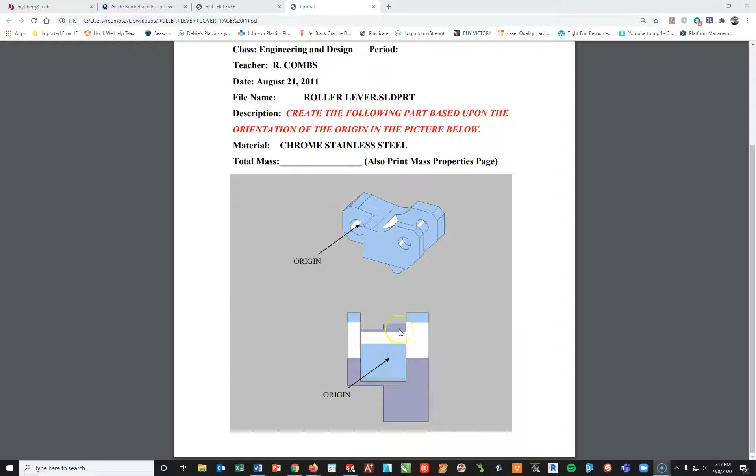We're basing it upon the origin pictured below. I know this is not easy to see, but basically the origin is centered in that hole, and it's centered in the part. So we will be doing a mid-plane extrusion in order to keep this centered up.

Looking at the drawing, I think the best approach on this one will be to start from that front view. So I'm going to focus on this view here, basically getting the outside and the holes and doing extrusion. Then coming back, again, I'm going to do a mid-plane extrusion.

So I'm going to go across to the mid. Then from there, what I'll do is come back in, cut some of the pieces off the back and underneath, and then finish off by using a front plane again and doing a two-way cut right here to get that center piece out.

So with that said, I'm going to get into my part. It's going to be a metric part today. So I'm going to go ahead and grab my SolidWorks.

And hopefully I can get this up and running. Come on, SolidWorks, get up here, baby. There we go. All right. I don't know why it does that little thing, that little hitch right there.

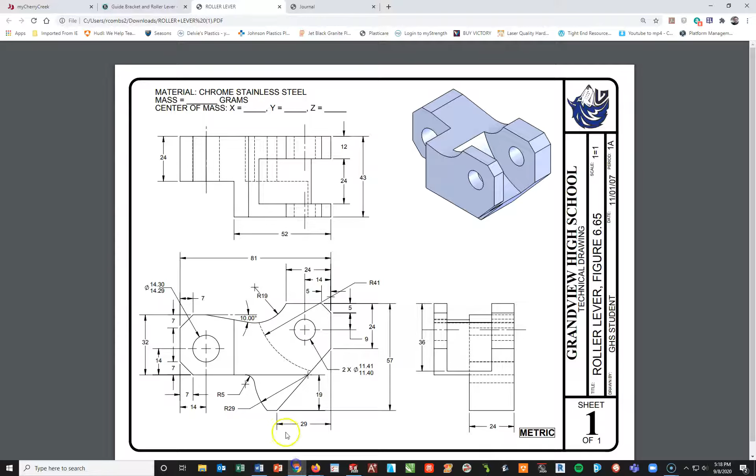I'm going to do a file new, do metric, and say OK. It sets itself up. So what I'm going to do right now is pull this over to my other screen real quick so I have something to view. I'm going to come back into SolidWorks and start on the front plane with a new sketch.

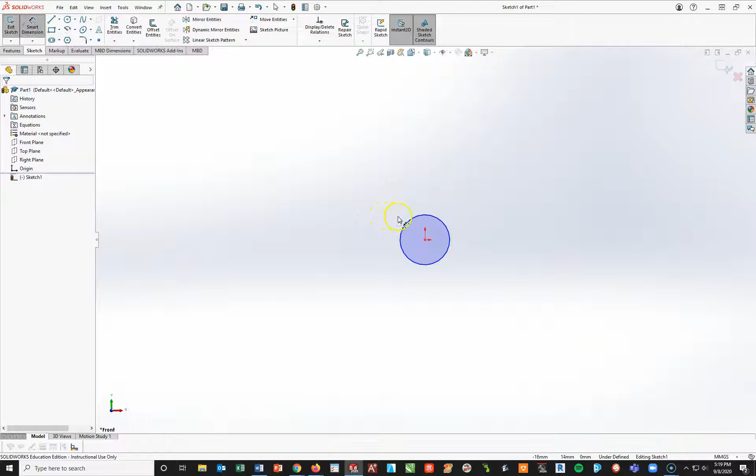Now what I'm going to do is start with that circle, because the circle is going to have the origin dead center, and that's basically going to be the starting point for this whole part. Okay? You'll notice that the dimension says 14.30 or 14.29.

That is called a limit dimension. I also call it tolerance, so it tells the person building it that they have a little bit of leeway there in that hole. I personally like using the round number, so I'm going to go 14.30, easy to work with, and hit my check mark.

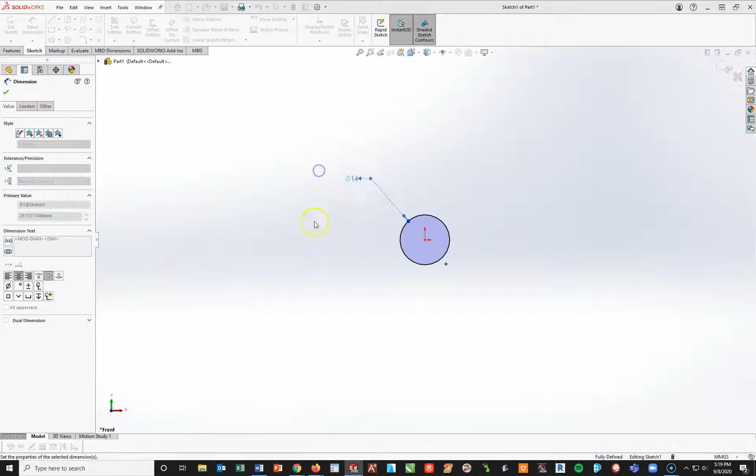Now from here, I'm going to go ahead and draw another circle a little bit further forward up in this range here, and now turn on my line tool and begin kind of creating the outline of this part here.

Coming down, I'll create my angle. Basically create this line. I'm going to go ahead and create that curve by touching this, create a shallow curve, pulling away and touching again and creating another shallow curve. Short line, and then I'm going to pull up at an angle.

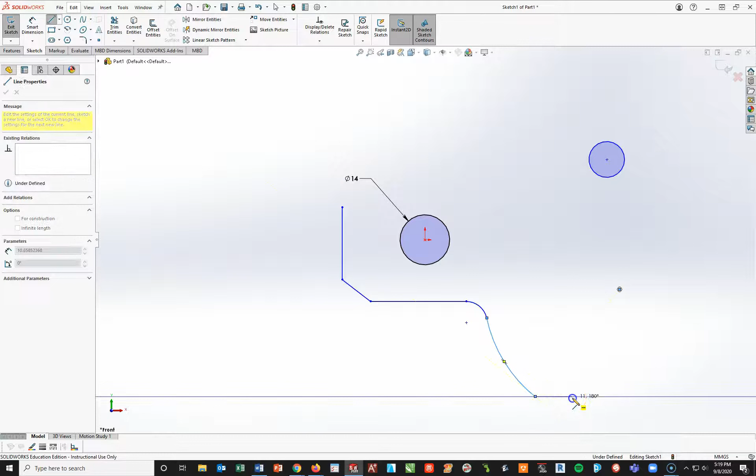Pull up at a straight line. As you can see, I'm going to have to probably move that circle because I'm already in the wrong spot. I'm going to come this way, and then pull away and create a shallow arc. And this one's a little bit hard.

Then I'm going to come this way here and finish by closing this off. Okay, I'll take this circle now and I'm actually going to drag it inside the part here. Now I'll go ahead and add this tangency here.

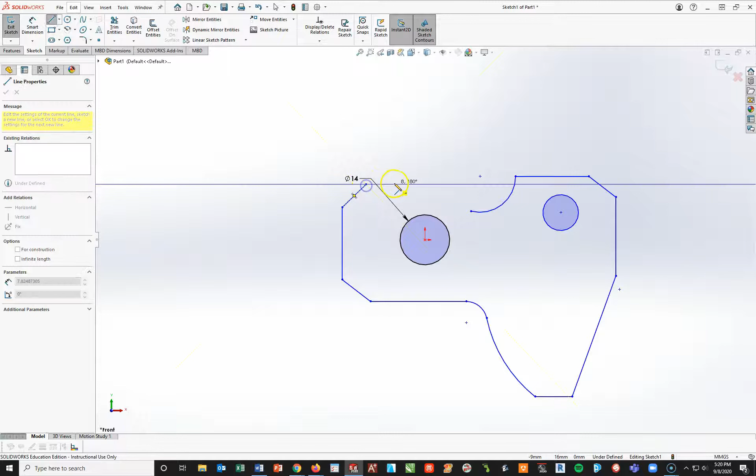And start adding in my key dimensions. Actually I messed up this line, I need to delete. I forgot there's a flat part right here, and then the line comes in like so. Okay, so I'll come back in and add that relationship of tangent.

Alright, now I'm going to start adding my dimensions in here. The one critical one I'll tell you is that the center of the left circle here is vertical to this line right here where the arc or angle line begins to go down. So I'm going to make that vertical. That will help get things started off on the right foot.

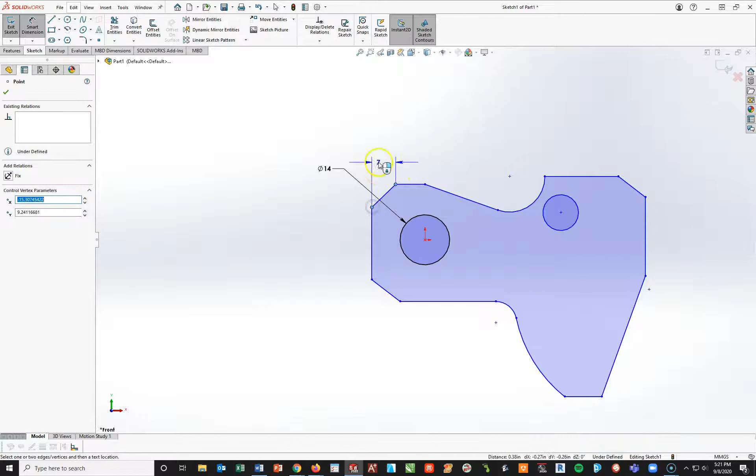Now in this case, I'm going to add in some key elements. I'm going to go from this point here to this point here and make that 7. From this point here to this point here, I'll also make that 7. I'll kind of pull that up in between. From this top line to the bottom line below will be 32.

The distance from this circle here to the bottom will be 14. And then same thing down here, this will end up basically being 7.

I'm going to do the smart dimension again from this point here to this one here - this will also be 7. The distance from this point here to the edge will be 14. I'm just putting the dimensions exactly in the same spot as you see them in the drawing.

Now continue up here. I'm going to take the flat line to this and pull to my right and make that a 10 degree angle. I'm going to have to do something here.

This right here is right now locked, and this is the most common error on this one. So if I try to do the R19, it's going to really blow this whole thing up. The reason is, if you look at the drawing - I'll bring that back over - this center mark is not on that line right there.

I need to get this to move away. So to make that happen, I'm going to have to break the relationship you see right here between this center mark and that line. I'm going to highlight that and hit delete so I can move this above.

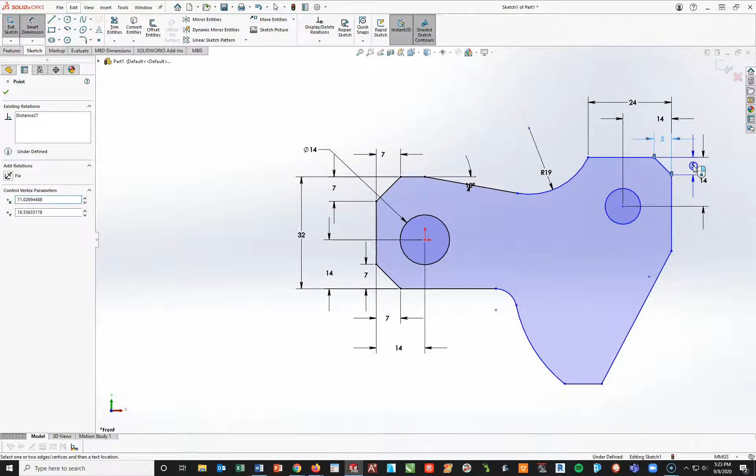From this point, I do it every time - I'm going to go here again. From this point here to this point here, I'll pull to my right and make that 5. Oh, in this case I made a parallel.

Now this is another common mistake - SOLIDWORKS is thinking for me, and it added a parallel when I didn't want one. So I'm going to cancel. I'm going to highlight my line and highlight this parallel symbol. When it turns blue, I hit delete.

And now I can come back and add in my correct dimension. So you got to understand SOLIDWORKS is thinking ahead a little bit - sometimes it's doing the right thing, other times it's not.

I'm going to do the same thing here, 24 from this point to here. From the very back to the very front, I'm going to do 81.

Okay, I'm going to do my line right here - or excuse me, my circle. I'm going to come down here. I'm going to make that 11. I like the rounded numbers - makes it easier to work with.

And then from here to this bottom line here, I'm actually going to pull this to the right - that will be 19. From this very top to the very bottom will be 57. I'll move this in just a second. 57.

And then from the front here to this tip right here will be 29. Okay, now it messed up - no big deal, I'm just going to slide this over.

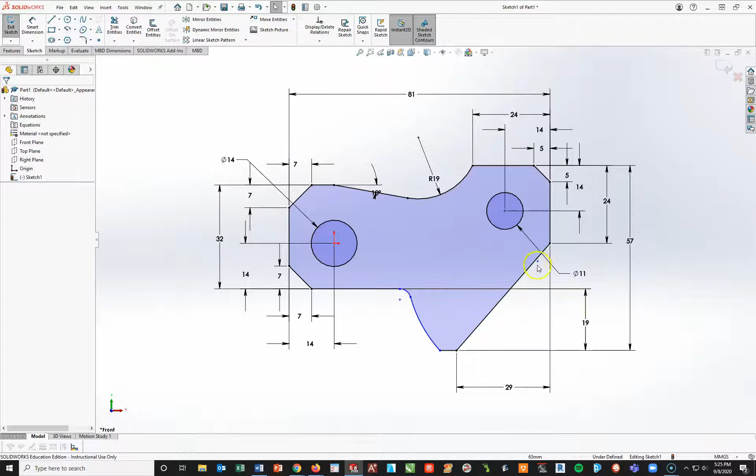The key is this right here - this point, this arc right here, needs to be on this line and horizontal to this point right here. So I'm going to Control key, click on that point, click on this line, and make them coincident. Then I'll click on this point again, Control key, and this left point over here, and make them horizontal.

I will then go ahead and dimension this right here to 29, and finish off by dimensioning this right here at 5. And just like that, I've got all the dimensions exactly in the same spot. This is going to be convenient when I do my drawing, because I am going to show a shortcut using model items, and it'll drop all my dimensions on very quickly.

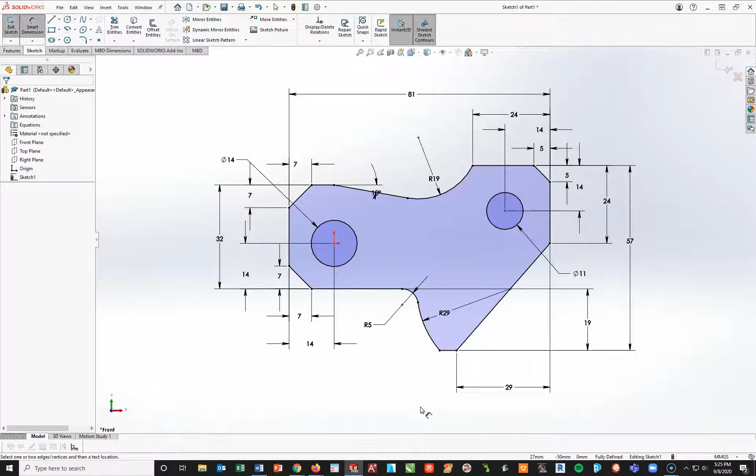Now from here, what I'm going to do is go to Features, Extrude Boss Base. Again, we want to keep this origin in the center of the part, so what I'm going to do is drop this to midplane, and I'm going to extrude this out 43 millimeters and hit my check mark.

I'm going to go ahead and change this to chrome stainless steel by editing my material. In alphabetical order, I see chrome stainless steel - apply, and close.

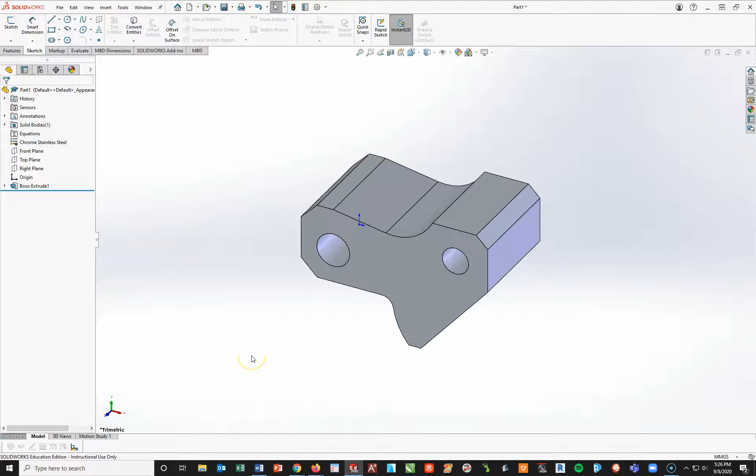Now before I continue on, I'm going to do a Control S to save, and I'm going to save this to my desktop for right now. I'm going to save this - caps lock - spindle, nope not spindle, excuse me, roller lever, underscore my last name.

Okay, so I've got the basic shape. Now what I want to do is come back here and take on this top surface, and cut off a rectangle that's going to cut all the way through this. So I'm going to go here and do a sketch.

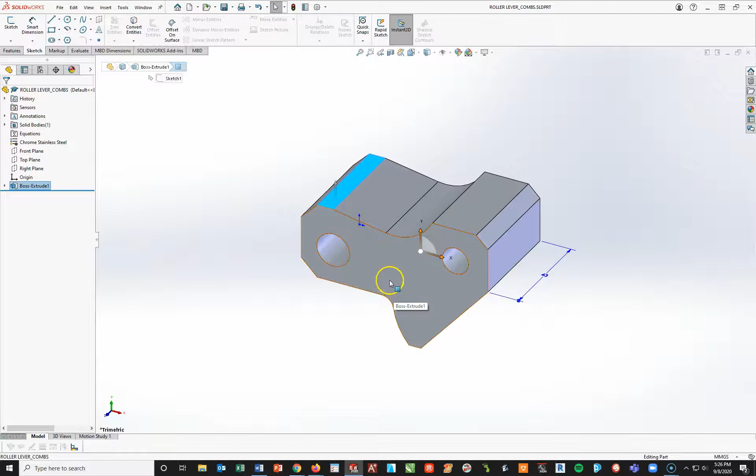I'm going to do a spacebar and normal to. I'm going to turn on my rectangle, corner rectangle tool. I'm going to attach and pull a rectangle. Now looking at the top view, I'm going to use my dimensions as I see them in the top. From the front to that line will be 52 millimeters, and from this back edge to here will be 24 millimeters.

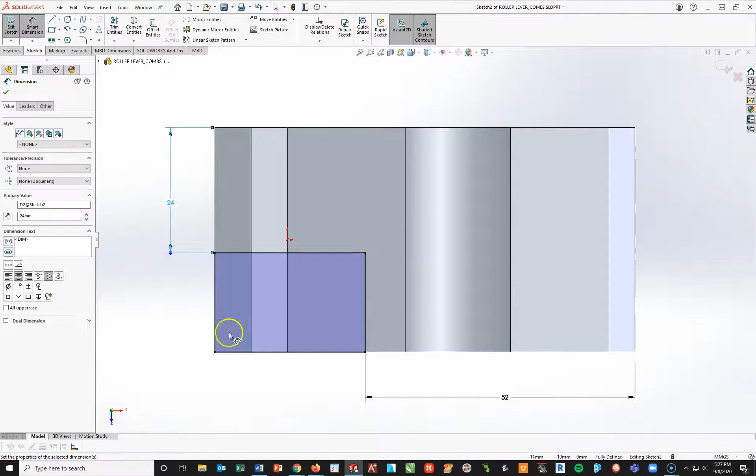Okay, so now if I go back to my isometric view, you can see I have basically this rectangle sitting here. All I'm going to do now is features, extruded cut, and I'll do a through all. And check.

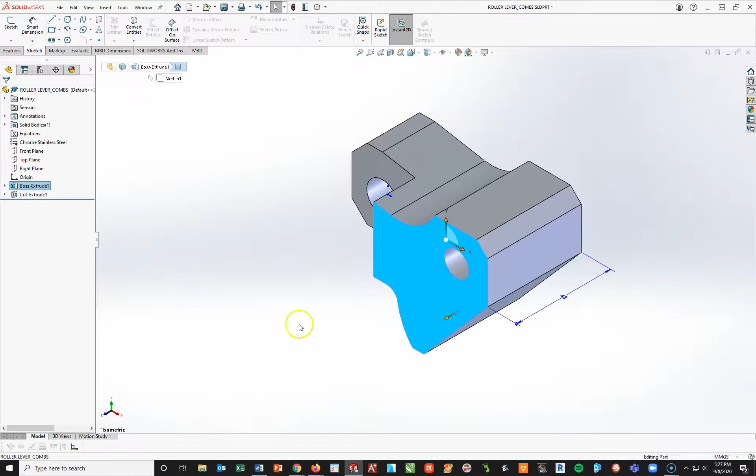Okay, I'm going to repeat that on this side piece right here. I'm going to go ahead and start a new sketch, spacebar normal to, and now I'm going to take my sketch tool and draw a line straight across, and then do what's called convert entities. So I'm going to turn on my convert entities. It wants to know which ones I want to convert. I'm going to hit this arc, this arc, bottom line, and this line right here, and hit my check mark. So all that did was take the edges and turn them into black lines.

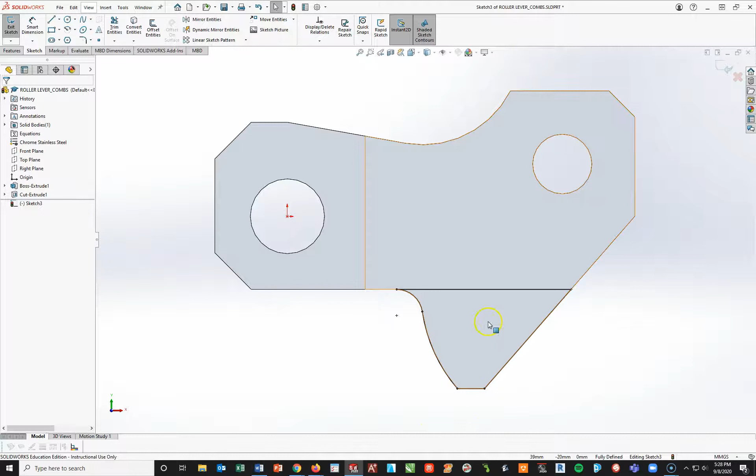I will trim off this excess piece right there. And now what I'm going to do is cut this piece here. So I'm going to go to Features, rotate so you can see this, Extruded Cut. And I'm going to cut this - in this case it's going to be 19. It's basically, if you don't know, I'm going to take 43, and I see in the right side view 24, so minus 24, for a 19 millimeter cut. Okay, I'm going to hit my check mark, and now that is done.

So I'm sitting at this point here.

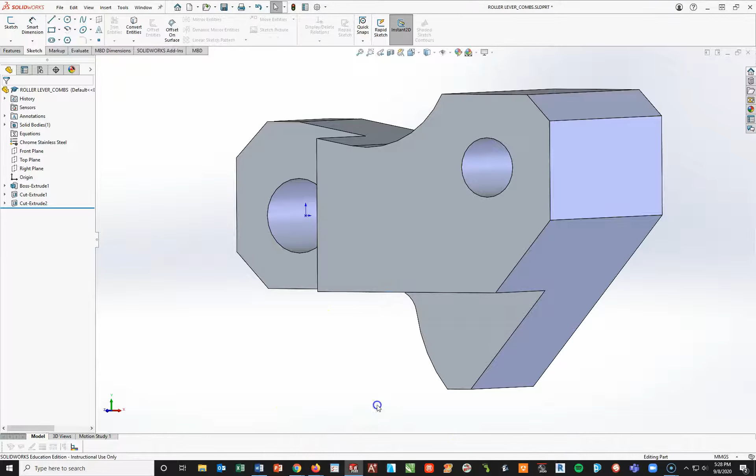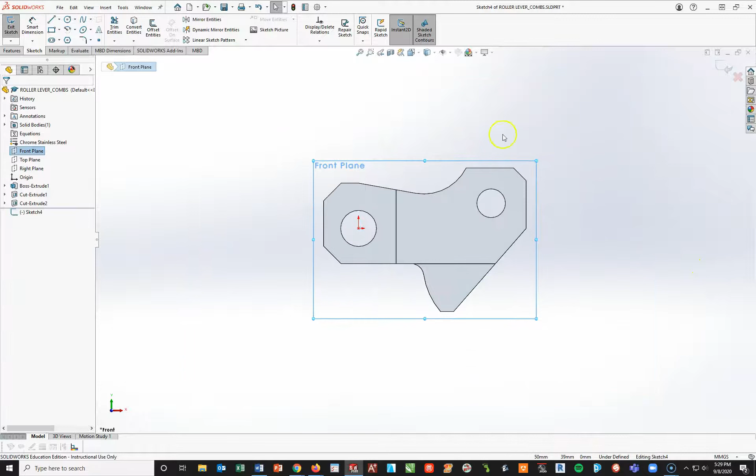Now I'm going to do a Control S to save, because all I have left to do is the arc cut inside. Now again, by doing this from a midplane, I can simply go to my front plane, start a new sketch, do a spacebar, normal to, and now I can start this with a circle tool. Alright, so I'm going to draw a big circle. Now what I can tell you is that this point is vertical to this point right here.

Nope, not coincident. I'm going to make it vertical. Okay, then I'm going to go in here and say, okay, the size of this is going to be a radius of 41, which is 41 times 2, which is 82.

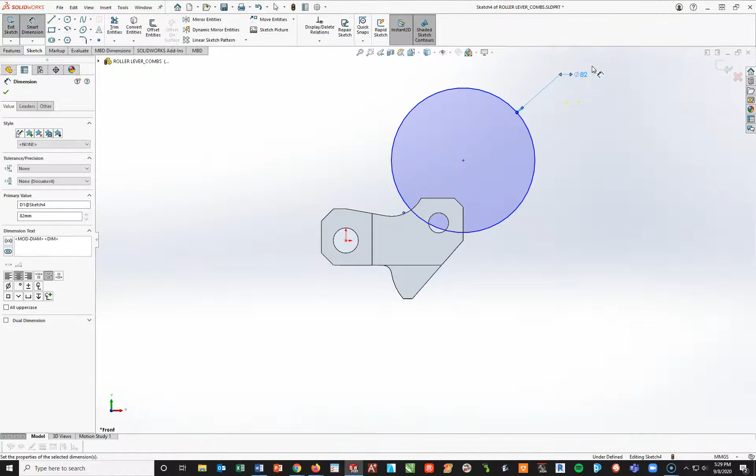Now here's the key on this. I'm going to pull this down a little bit here. What I'm going to do is actually go in here and create a point, or actually convert my lines. I'm going to hit this surface right here and do a convert entities. Okay, so all I did was convert all this out here. Alright, now what I'm going to do is some trimming and trim off what I don't need, which is these lines here to here.

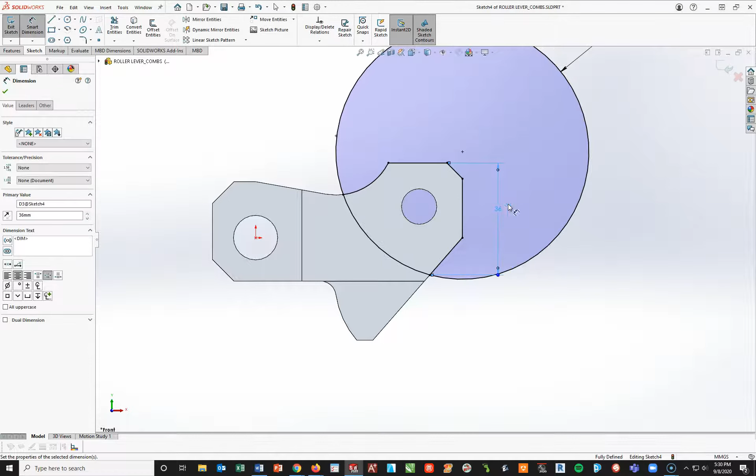Okay, now what I'm going to do is measure from this intersection point of this circle and line to here, and according to the right side view, that is 36 millimeters. What I'll do is finish off by getting rid of this out here, leave me just this piece on the inside. Okay, now I'm going to go to my features and do an extruded cut.

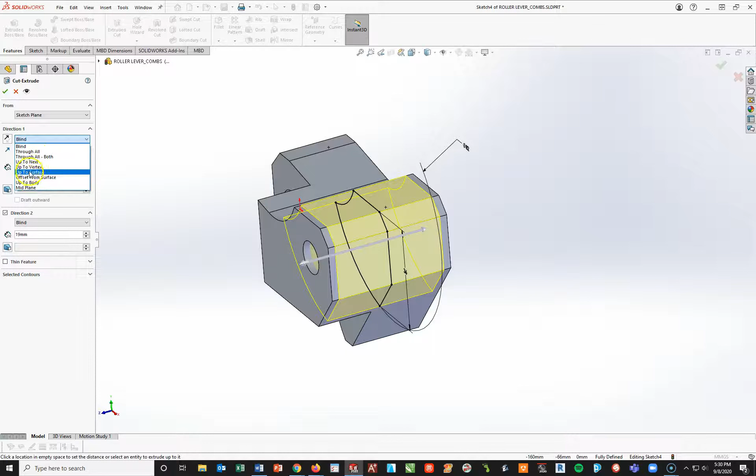Now the nice thing is I can cut in two directions, direction 1 and direction 2. So I'm going to go here - I'll actually show you one. I'm going to do offset from surface, up to surface, offset from surface, and I'm going to pick this surface and tell it I want to offset 12 millimeters.

Okay, turning that off, 12 millimeters. So what it's saying is that I want you to cut until you're 12 millimeters away from this surface. I'm going to do the same thing on the other side.

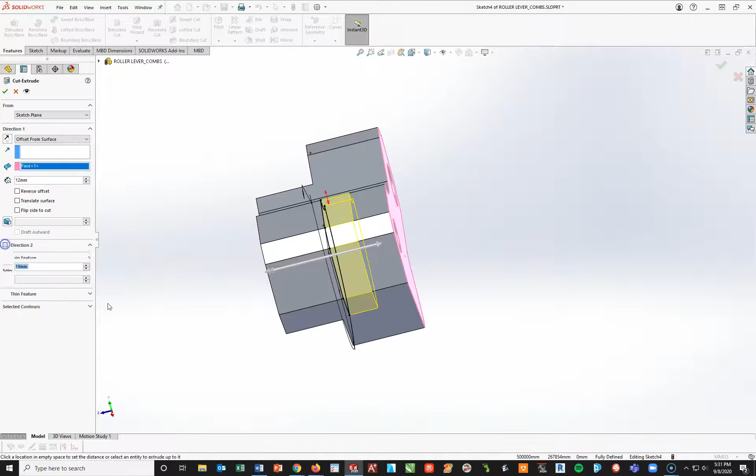I'm going to go here, and instead of blind, I'm going to do an offset from surface. I'm going to pick this surface right here, and I'm going to offset that. If you're not sure what the number is, you can simply take 43 minus 12 minus 24, and I'm just taking the numbers straight off the top view. That gives me a distance of 7 millimeters.

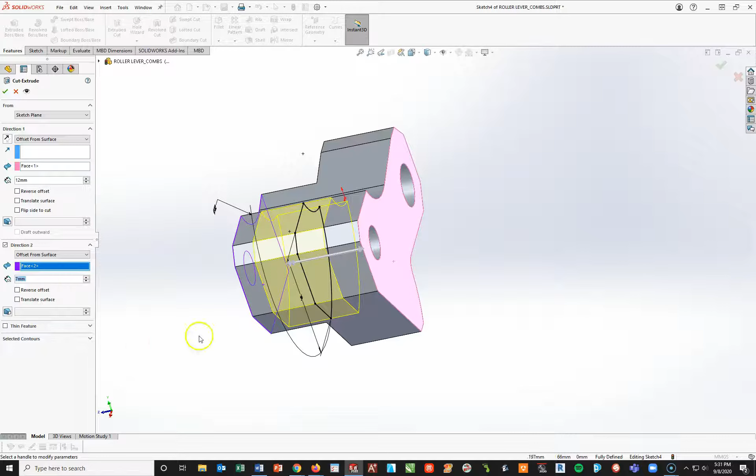I hit my check mark, and now I am complete with this part. I'm going to do a Control Save. Now, your job is then to go find the mass properties, get the mass and the center of mass based upon the location of its origin.

At this point, though, I want to go through the drawing. I'm going to do it very quickly. I'm going to open up a GHS A metric and say OK.

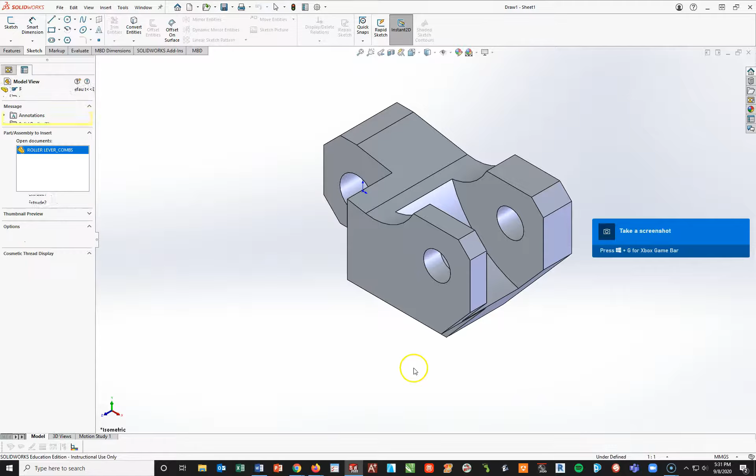Never mind this little whatever Xbox thing. Sorry, I apologize. I'm going to double click on my roller lever. Start with a front view. Preview. Hidden lines on. Scale should be at 1:1.

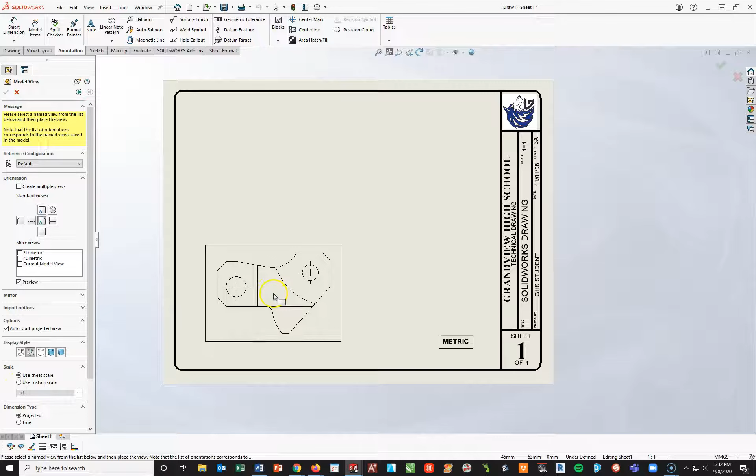I'm going to start here with the left-hand side with my front view, my top view, my right side view, and my isometric view. I'm going to highlight my isometric so I can add color. You could also do it without the black lines. It's up to you how you do that. I don't care either way.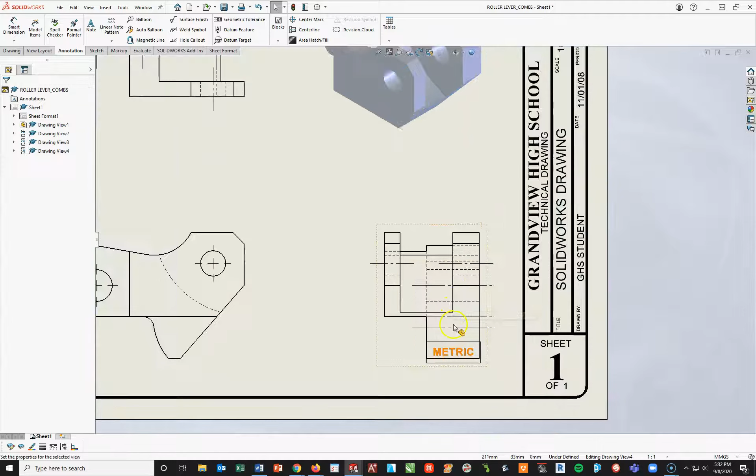I do want the extra black lines to disappear. I'm going to take this metric and move it down here and get rid of that little box right there, and come back now, click on my metric, and I'm going to go ahead where it says border none and change it to box.

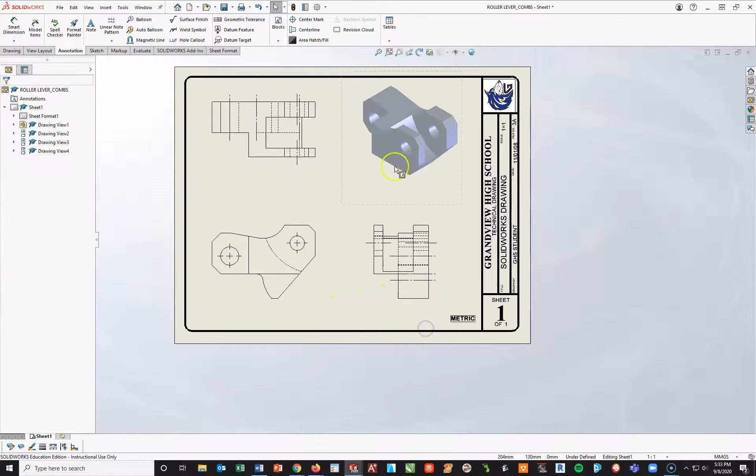Alright, bring this in a little bit tighter, that will help. Now, I'm going to go through each one of these views and make sure I have all my center marks I'm supposed to have, all my center lines. So some of them I got to get rid of, for instance, this one here.

Okay, I'm going to go up to this. That one's good, but I'm going to get rid of this one here.

Alright, now you see some extra black lines, and it's okay if they're there. I will not down mark you, but if you want to get rid of them, one of the things you can do is by right-clicking in each view and go to your tangent edge. Oh, never mind, it's already, should probably be set for tangent edges removed.

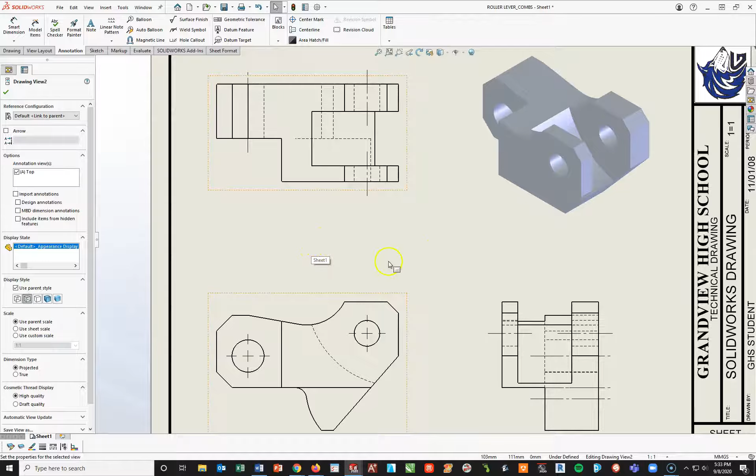That is okay. Alright, but now I'm going to go over here to this right side view. I need these two, but I do not need this one here, or this one here.

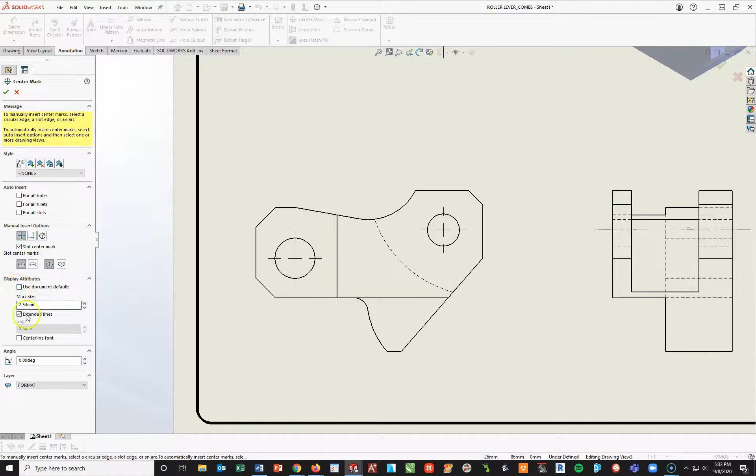Okay? I need to finish up, though, with some small center marks on this front view. So I'm going to go to Center Mark tool. I'm going to take my defaults off, extended lines off, and I'm going to add in some center marks by clicking on all my arcs, including this one here and this one here.

So that should be 4 total that you add in, 1, 2, 3, and 4, and then I'll hit my check mark.

Now, one of the cool things you can do here is at this point I can go in and go to what's called model items. Now again, if you did a lot of your sketching and put the dimensions in the same spot, this is really a cool little feature because you can basically drop everything in, and based upon how you sketch, it will put the dimensions in the same areas.

So I'm going to go ahead and make sure that I have, so you can look here, mark for drawing. I'm going to go ahead and turn a bunch of these things on. I don't need to worry about that. Tolerance of dimensions I'll do. I'm going to do this, and any hole wizards, I'll just leave it as that.

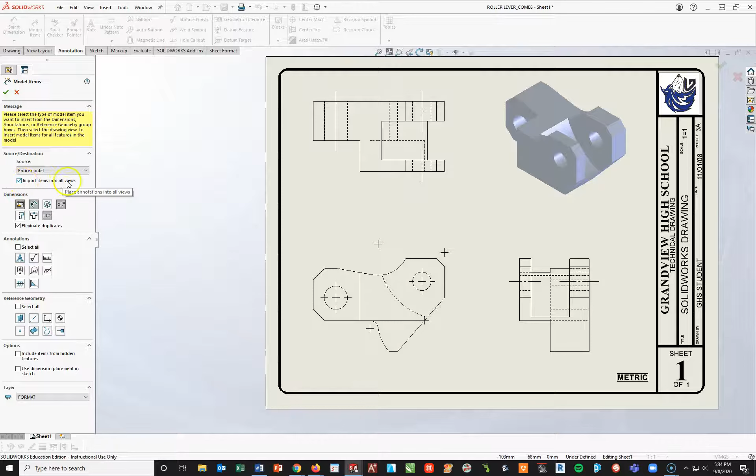Okay, where it says selected feature, I don't want the feature, I want the entire model. And I want to import it into all views. So I hit my check mark, and there are all my dimensions.

Now obviously it looks like trash right now, but at this point all I'm going to do is start pulling things in a little bit tighter. Okay, I'll flip my arrowhead here. Flip that by hitting that point. I'm going to take my 7s, and I just got to start making small adjustments. So I'm just going to start moving numbers around and just cleaning everything up.

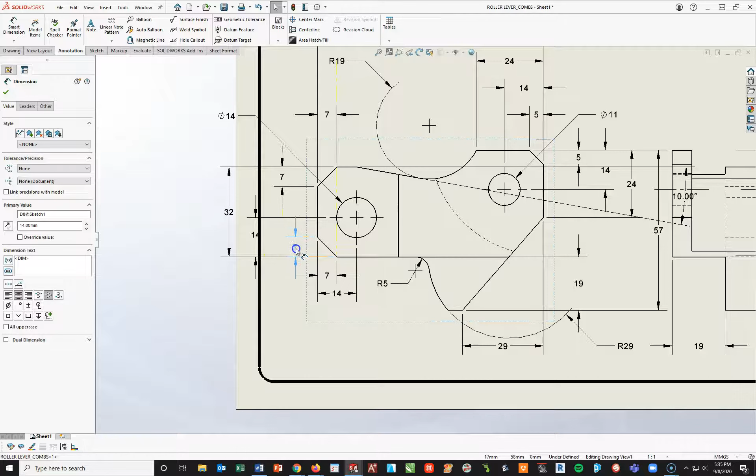I know it's not, is it any better than before? I think it is. Again, take the 29, I'll put that way. This 29 is good. I'll bring my 19 in a little bit tighter and flip my arrowheads in.

As you can see, all I'm doing is just cleaning things up. So I'll put the 5 right there, bring the 14 in, and bring the arrows. Bring in the 24, bring in my 57, okay, take the 10, I'll bring it back this way.

Actually, I think I brought it right like that. That works for me. The 11, I'll get to in just a second, but I'll bring it down this way. We'll get to there. I'm going to tighten up the 5, bring in this 14. As you can see, it's just a matter of quickly dragging stuff right now.

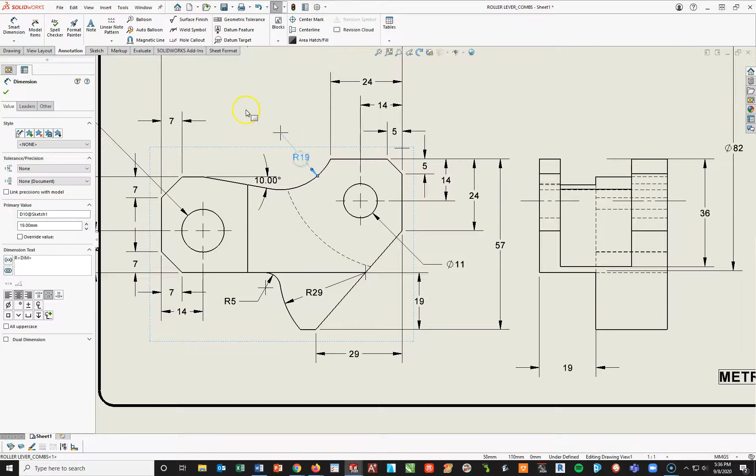Okay, I'm going to take this and bring this 19 to the inside, and flip the arrowhead over. Bring the 7 in a little bit tighter, that looks good. Bring my 11 in a little bit closer, okay.

So basically I'm just playing around with the numbers. Bring this 14 in. I can bring this over a little bit more. I'm going to get rid of the 82 on the right side view.

I'm going to take my 36 and move it over and grab this point and grab it to there. The 19 right here I'm going to get rid of, and instead I will add in real quickly a 24 here, and that takes care of my right side view.

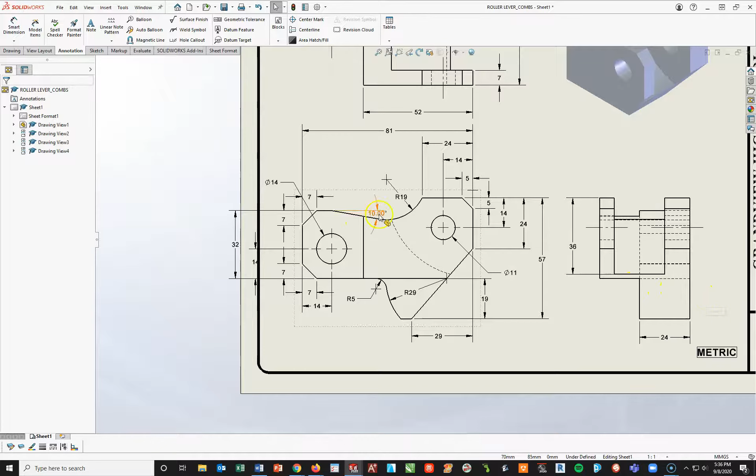So now I can basically move things around again. I'm going to slide this over a little bit more. That way I can slide this one over a little more and bring my 14 in.

Bring in my 32. I've got my 14, my 7. That looks good there. And now I've got basically all my dimensions here. Then I've got my 52.

I'm going to slide this up a little bit more. Move my isometric over a little bit more. 43, I've got my 12.

Instead of the 7 though, I'm going to delete this and add in my 24. So I'll go from here to here. There's my 24. Okay, 24 back here, 52, 43.

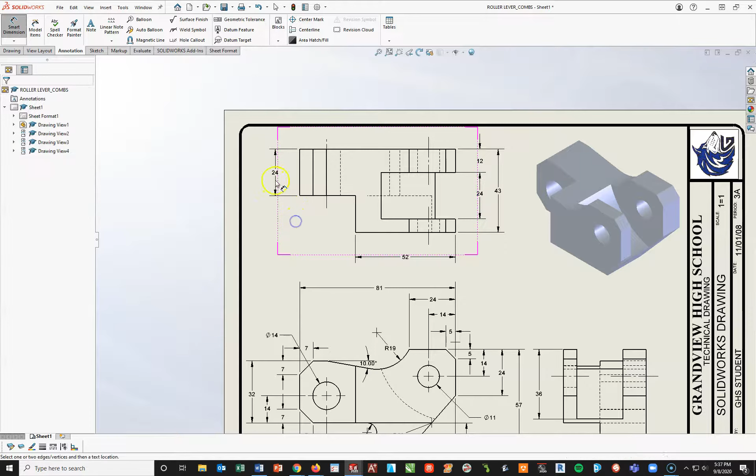That all looks good. The last thing I need to add here, I'm going to slide this one up a little bit more. Okay, the last thing I'm going to do is slide this over. I need to add a note, and I need to change this number and my 14.

I need these to be what are called stacked dimensions. So I'm going to left click on it, and over to my left where it says tolerance and precision, it currently says none, I'm going to drop this to limit. And what it's going to do is stack these two numbers.

Now the bottom number is correct, but the top needs to have a 0.01 added to it. Over here to my left, this is my top number, that's my bottom number. I need to add to the top number 0.01, enter. And now it's set. Okay, hit my check mark.

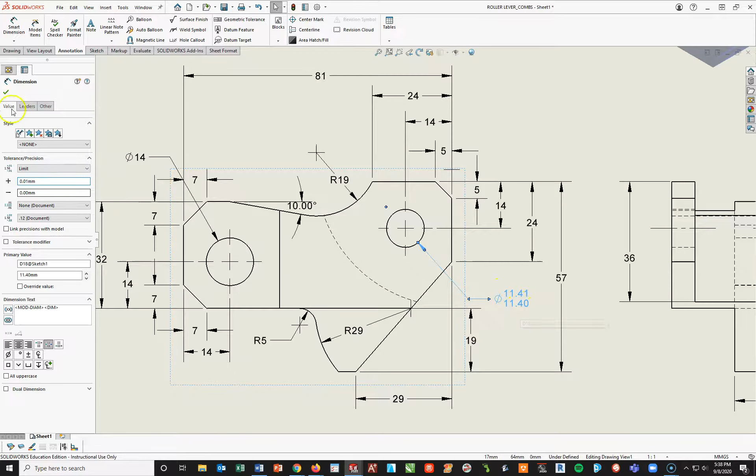Don't worry it moved, I'll just readjust it. Same with the 14, I left click on it. Where it says tolerance precision none, I drop to limit. In this case, I'm going to drop the bottom number by 0.01.

So now there is my final dimension there. This is again called a stacked or limiting dimension. Now with this one, I'm going to also add in that 2x by putting my cursor in the dimension text box to the left. 2 space x.

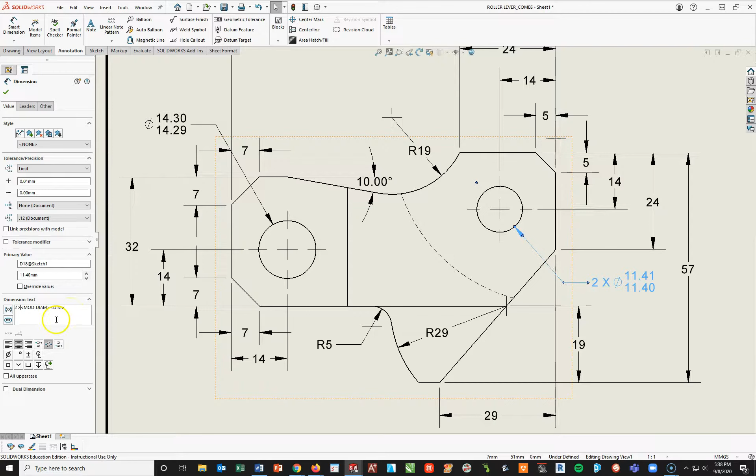Okay, hit my check mark, and now I have all of my information I need for this drawing. Okay, don't forget you need to add the mass. I'm actually going to put it right here in this part by copying.

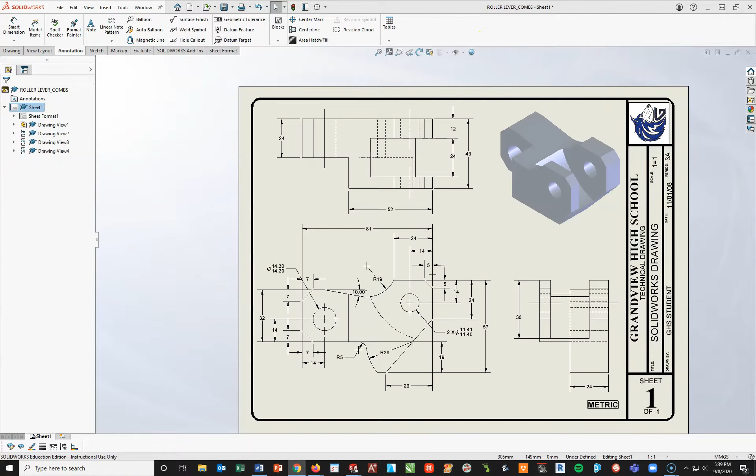I'm actually going to do a copy paste. So I'm going to go here and do a Control C. Come over here, I'm going to add in my annotation and my note. Drop the note right here and do a Control V.

I will highlight this whole thing. Left justify. Font size 12. Okay, hit my escape, and I'm just going to adjust this.

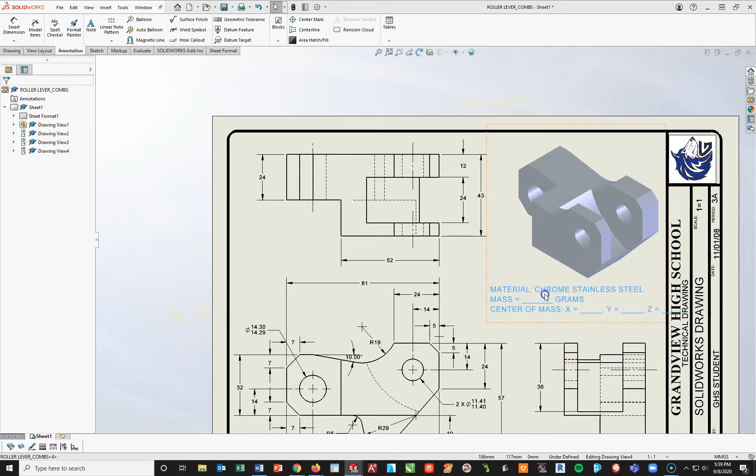Now remember, when you do this, I expect you to add in the actual grams and the XYZ for this one, in addition to entering it into the assessment in Schoology. Okay, when you're done, don't forget to change the title, the name, date, and period.